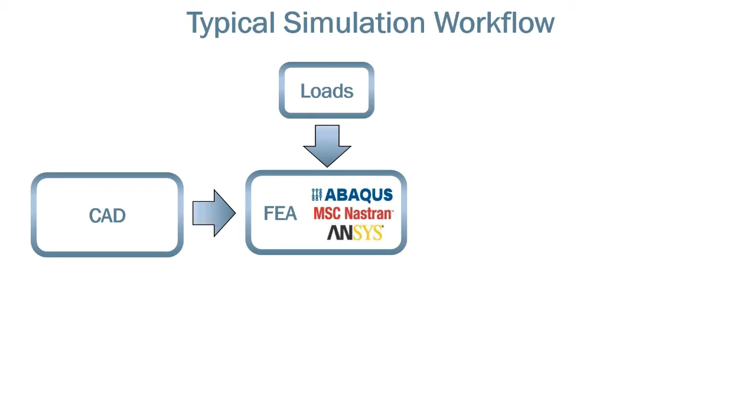Let's talk about what a typical simulation workflow may look like. Most of you are familiar with having some type of CAD model, then moving into doing FE analysis using Abaqus, Nastran, ANSYS, or any of the other dozens of solvers that are out there. Typically, you'll have some loads that you apply to that analysis — maybe some calculated worst case loads, maybe limit loads, maybe some inertial loading, etc. But somehow you've either measured or generated or calculated some kind of loads that you apply to the system.

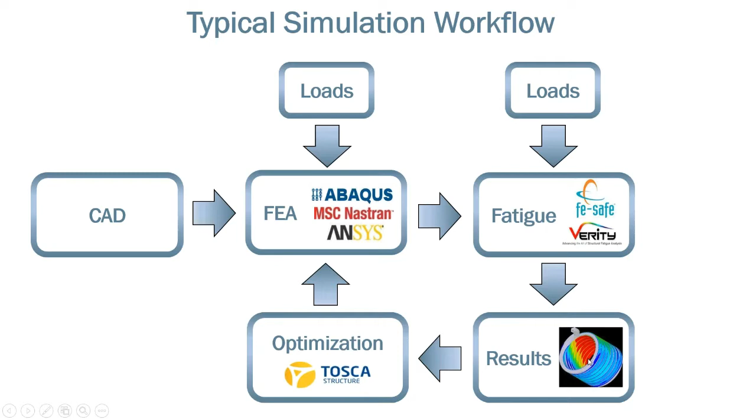From there, typically most people will then go into potentially a fatigue analysis process, taking either combinations of load cases and applying them to do a fatigue calculation, or using some kind of unit load scenario where you have time histories of loads that scale and combine on those unit loads. Output from a fatigue process will be some type of life results in terms of hours, repeats, miles, etc.

Then potentially you could go into some kind of optimization process. In this case, we're showing Tosca, and then go back into some redesign, analyze loop there.

So while we were at Caterpillar, we spent a lot of time and effort trying to get accurate time histories of loads. We would take our machines and use machine pins, and calibrate those pins so that we could measure from the strain what load was coming through them.

We would take any type of joint system, whether it's an axle or shaft or something, in machine areas where we could lay strain gauges. We had to lay strain gauges on our hydraulic cylinders so we could accurately measure loads coming in through there.

So we could get a full time history of loads for that structure for a complete event, and then be able to take that load data and cycle it back through in some kind of FE analysis or fatigue analysis, either at certain set points or a complete duty cycle.

While we were there, for every vehicle and every load case or every duty cycle that we tried to validate, we would spend upwards of $250K on just acquiring the load data. And that doesn't account for any of the time afterwards.

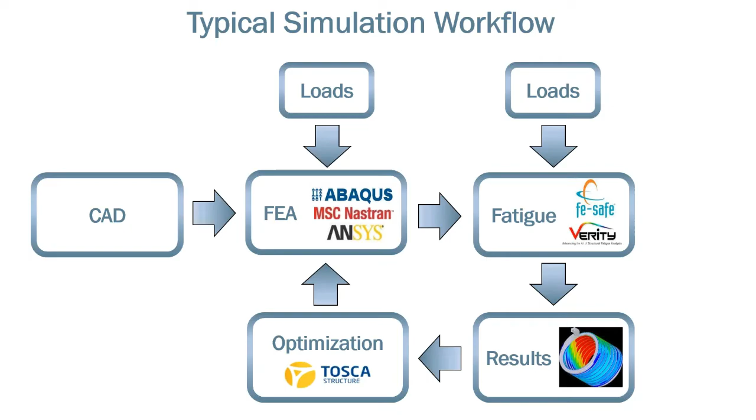But before I get too far, I want to show an example that a customer sent to me last week. This customer said, hey, we have a tube that we want to measure some loads on. They'd had some idea about TrueLoad, but they said, hey, we want to measure some loads.

We really don't have a lot of time here, but we've looked up in our handbook, and for a round tube, we can put strain gauges on and calculate the torque load that's coming out of there.

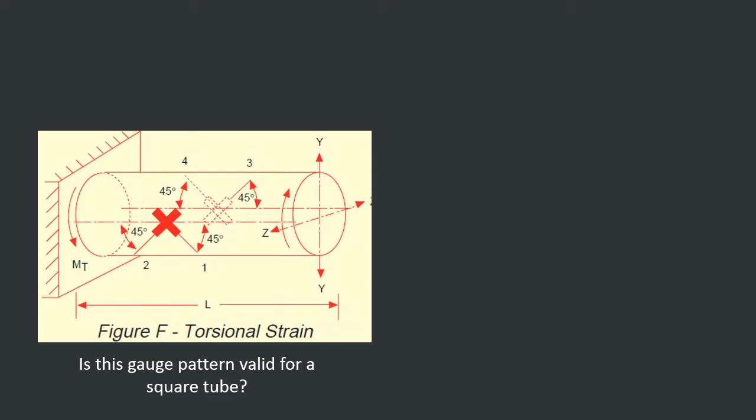Is this process still valid for a square tube? I said, yeah, we can probably still do that for a square tube. We can put some stuff on. I said, send us the geometry, let us take a look at it.

So they sent us the tube. Okay, but the tube has some structure coming out of it, and they not only have a moment out here on the end, but they also have an offset load here. Okay, that we could probably still work with. But then they came back and said, well, it's not really just that.

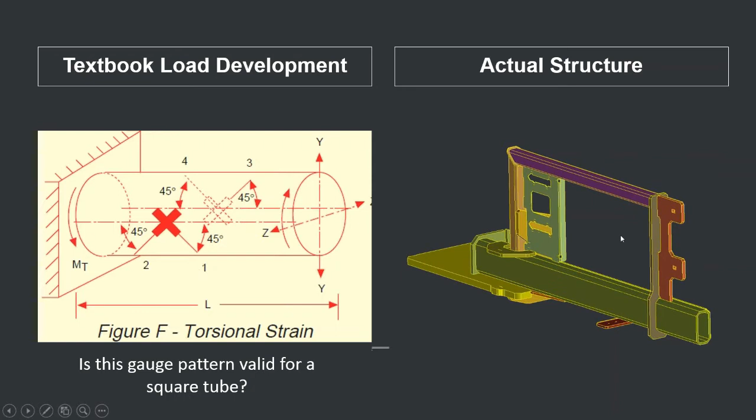We've also got some other components attached here, and we've got some side loads coming in through this structure as well as some vertical loads. So now we're not just talking about a torsion or a moment anymore, we also have a bending load.

And then as you look a little further, they have some additional structure attached to the system, and when you look at the full system, this is what it looks like. Just like in real life, these textbook examples don't usually correlate very well to what you really have. So we went through and said we really need to use true load for this, and convinced our customer that's probably the best way to go to place our gauges and go through that process.

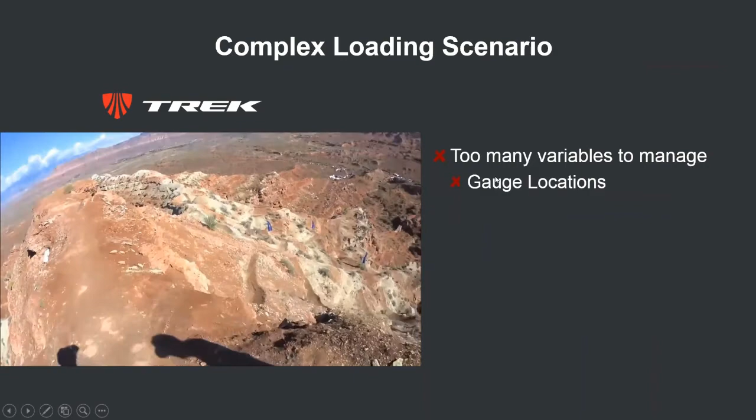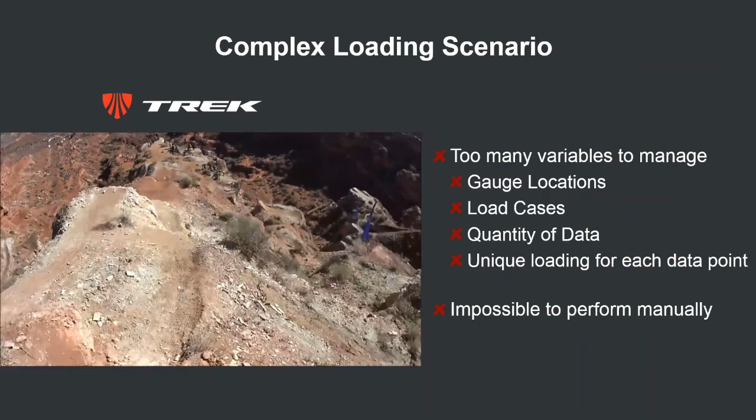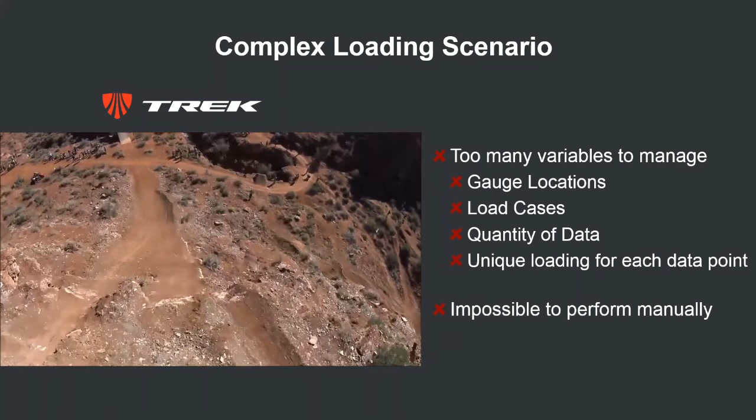So as we look at different complex loading scenarios, I want to show something that one of our other customers has used. This customer, Trek, has bike frames with very complex loads coming in. They went out, before they found true load, and gauged up this frame trying to calculate loads coming into it. During that process they had 20 or 30 different gauges that they're trying to locate and manage, with a lot of different load cases.

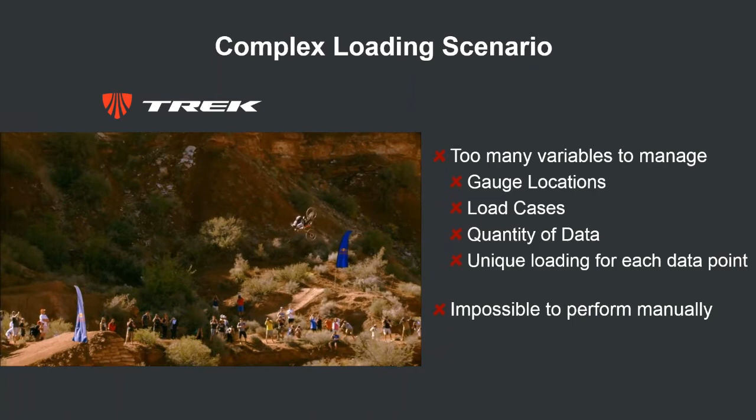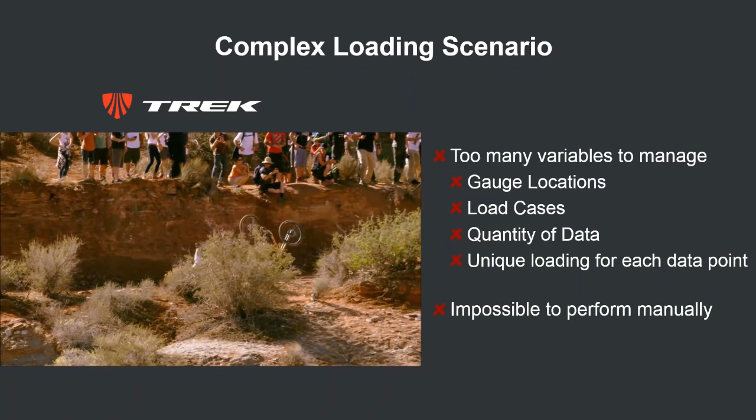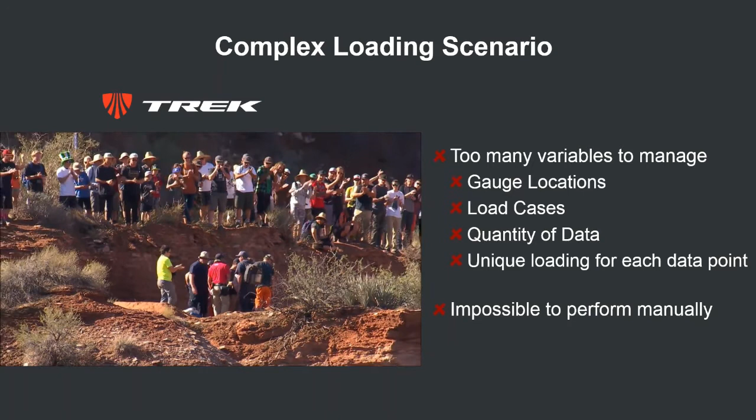They're looking at the different quantity of the data they got. They have unique loading points for each, unique loading data for each load case, and it was impossible for them to perform this manually. You can see in this type of event the kind of severe loading that goes into one of their structures. Now the good news is this rider's okay, he gets up and no problems. But we wanted to show you this as an example of some of the extreme load cases that happen.

So let's get back and talk about true load a little bit. True load was developed by Dr. Tim Hunter through his 22 years at Harley-Davidson. There he was the chief engineer for vehicle structures, and when he left Harley in 2010, he founded Wolf Star Technologies.

So Tim used true load. During his time at Harley, they would spend a lot of time building prototypes, and what they called a prototype was essentially about 85 different motorcycles that covered the different variations of their configuration for each platform. When Tim started the process, they were building about 6 different prototype phases. So 6 times 85, that's a lot of motorcycles - that's millions of dollars they're spending.

They'd get through the process, and during some of those phases they'd find, hey, their loads are wrong, or they're having cracking problems, or they're having failures. Tim mentioned one instance where they're ready to roll the product off the line, and they found very late in the test phase that they hadn't accounted for a different unique loading scenario, and they had to stop their production and spent several million dollars.

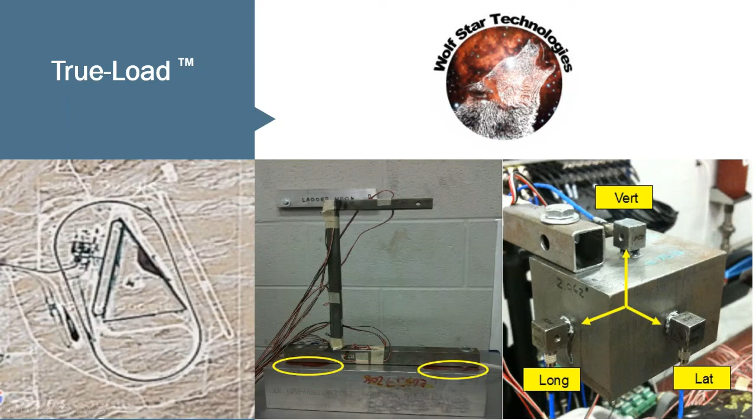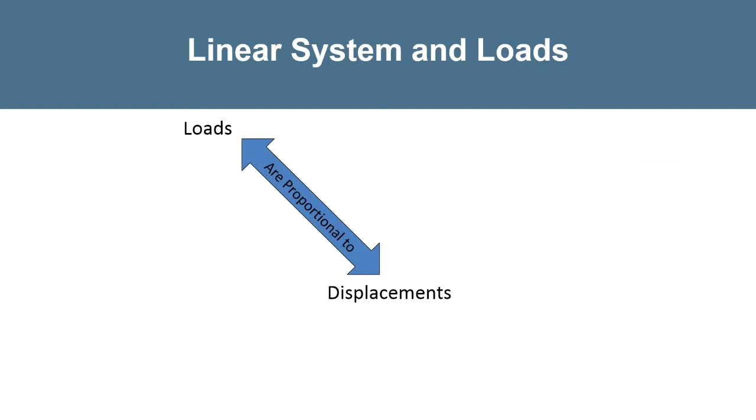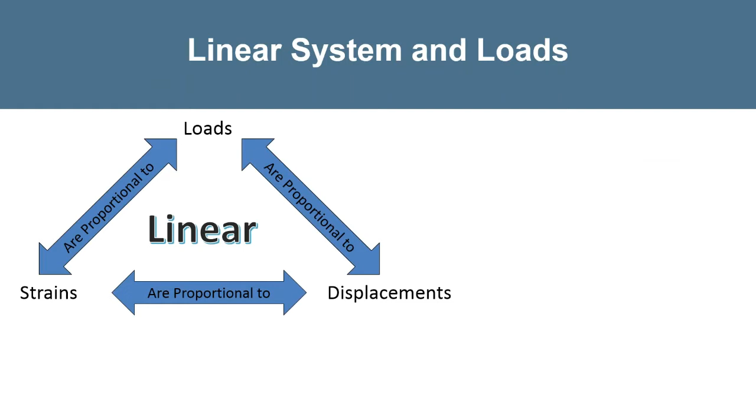So let's talk a little bit about what TrueLoad is. TrueLoad is a linear system. It works on the principle that loads are proportional to displacements, displacements are proportional to strains, and strains are proportional to loads. So what it requires is that globally your structure behaves linearly. It can have local nonlinearities, local material nonlinearities, contacts, etc., but globally your structure behaves linear.

In other words, what we're doing is setting up an equation, F equals Kx, or if we rewrite that equation, strain times the correlation matrix equals F. We're getting our forces from the strains in the system. The strains come from test, the correlation matrix comes from FE. We're able to combine those two to back-calculate what our forces in the system are.

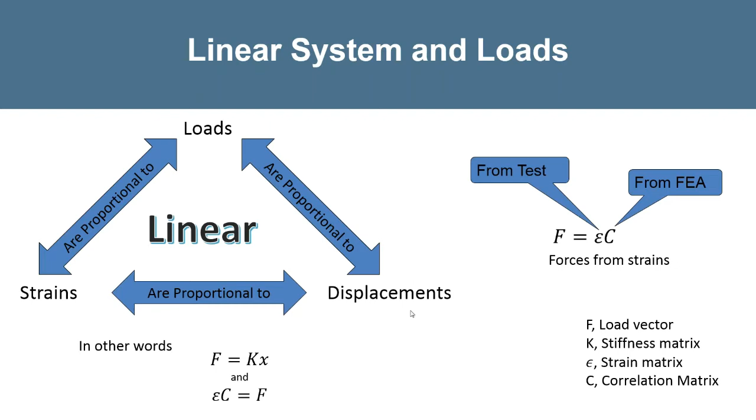So as we go through, let's talk about the TrueLoad process. I'm going to walk through a couple of steps of what that process looks like, then we'll get into some examples and dig into more details of how TrueLoad actually works.

Step one is collecting the data, what we like to call a pre-test. You build some type of FE model and apply your best known loads and boundary conditions to it - what unit loads you think are going to be applied, in what directions, and how that model is constrained. This is one of the areas that TrueLoad really brings to the front: you really need to understand the loads and boundary conditions of the model and how it's actually behaving.

What assumptions can I make? Anytime we have problems with correlation, we usually can go back and look at whether we made the right assumptions, and tweak those assumptions to get better correlation. But this is 90% of our problem - understanding what our actual loads and boundary conditions are.

So once we have our unit load model, we'll run what we call pre-test. That's essentially identifying and locating the gauges on the system. TrueLoad has an algorithm to go in and place gauges in the best locations, and it also has tools to tweak those gauges so that if you've given it areas that may be hard to reach, we can simply move or reorient those gauges to be more conducive to applying in test.

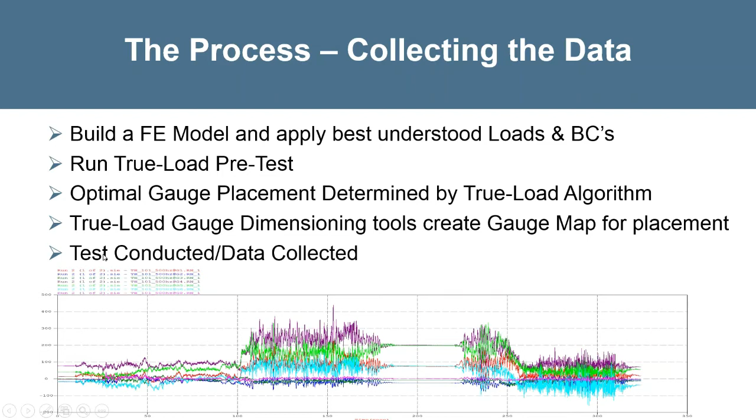Once we've identified the gauge locations, TrueLoad's pretest component has some very nice gauge dimensioning tools that we can use to create a gauge map to give to the test department to lay them, or if you're a small company, you may go out and lay some yourself. Then we'll come back and conduct the test and collect this data.

So now once we've collected our strain data, we need to go back in and calculate the loads. We take that collected strain data from the test and feed it back through TrueLoad. TrueLoad is going to essentially multiply that strain data by our correlation matrix that we calculated in pretest, to calculate the calculated loads and load time histories.

General rule of thumb is we need about 1.5 to 2 times the number of strain gauges to the loads we're trying to calculate. Because we're trying to solve a linear system of equations, we need more knowns than we have unknowns.

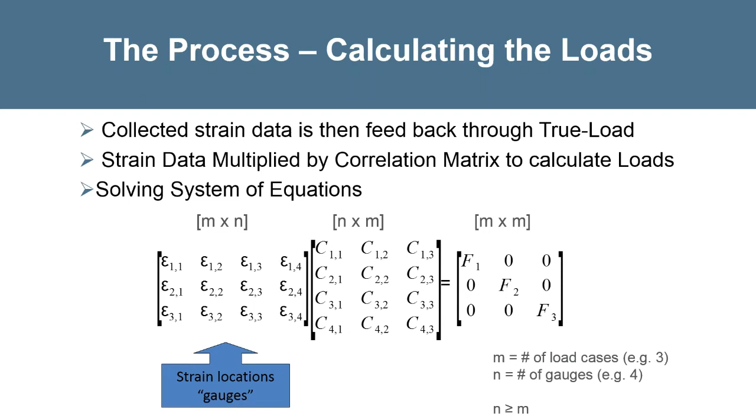Once we've calculated that load data, TrueLoad has a very nice set of tools to go through and do correlation and plot history plots to validate how well the system is correlating. TrueLoad automatically creates what we call a cross plot, which is our FEA strain versus our field strain.

The process is we plug our test strain, our field strain, back into TrueLoad, which calculates the load time histories, and then automatically feeds those load time histories back through the model to get the FEA strain, and then plots that strain against our field strain. If we have a very well correlated model, that data should line up on a 45-degree line.

In some cases it doesn't, where we may not be using the right assumptions. It also has some very nice tools to plot field strain versus simulated strain, so you can see how well it correlates, or see areas where things may not correlate very well.

In addition, what's very nice is it has ways to automate that time history. So instead of resolving the model for a full time history, it automatically scales and combines your unit loads times the calculated load data to get full field strain, stress, and displacement data for these duty cycles.

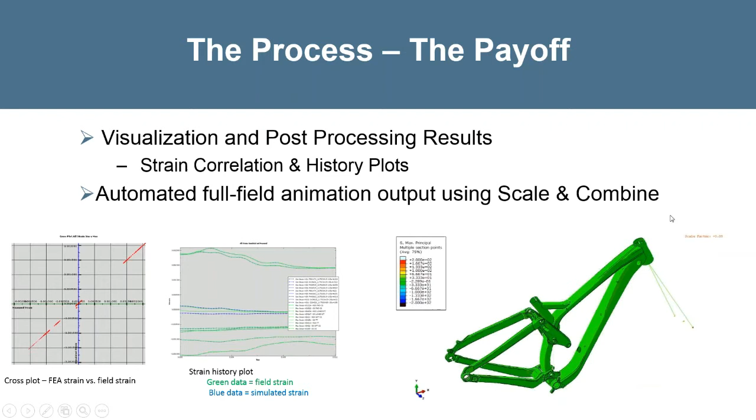So that was a brief look at it. I'm going to go through more of TrueLoad later and get into the nuts and bolts and the details, but I wanted to give you that high-level overview.

Back to our simulation workflow, we've got our FE model and we're looking at fatigue results. TrueLoad now replaces our loads that were maybe calculated by hand with a plus-minus scenario. So instead of having some worst case or static loads, we're now able to use TrueLoad to calculate a full time history of loads to really get in and perform detailed fatigue analysis with accurate load data.

So the workflow replaces any of the load data that we were calculating manually or with some hand calcs with actual full data from a physical test.

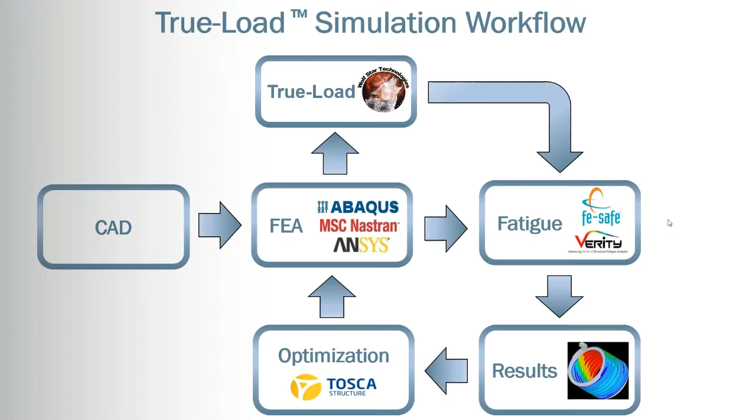So what I want to look at now are some examples and applications of TrueLoad, how we use it, where we've had some customers with success, and several techniques that we've applied.

One of the first projects we worked on with Tim was calculating blade loads for a bulldozer. In this scenario, one of our customers was having a very difficult time calculating ground engaging loads and really correlating the model and validating that if we even went into a lab and applied a known load, we could get the same type of strains and load data back out of the system.

So we went in with this customer and worked with them and said, okay, let's apply a series of gauges along the push beams and on the back of the blade so that we can go in and apply a known load and see if we can get actual strain data back out that would match.

What we were able to do then is not only did we have our TrueLoad gauges, but we also applied gauges near some welds, essentially in some hot spots that we could use to correlate our test data and correlate our model. After we got done and went through a couple iterations where we had to tweak some of the assumptions that we put into the model and how some of the connections in the system were made, we found that we could very well correlate strains in the model with strains measured in the test.

And we're within about 5% correlation when we looked at high strains in an area of high strain gradient near a weld.

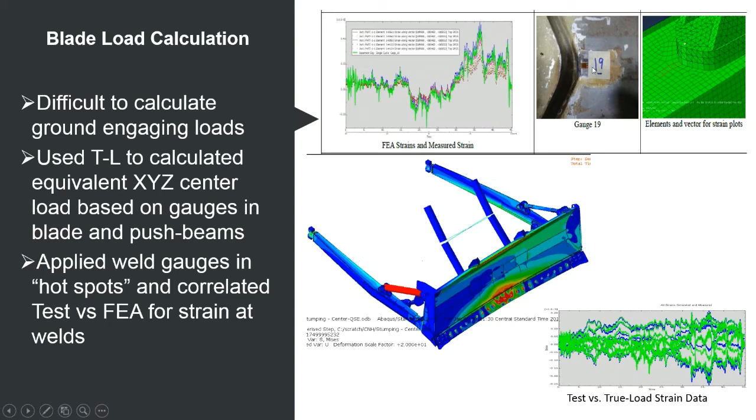Another example that we have is a crankshaft example. This customer had known that they had failure locations for a long time, and they were trying to figure out exactly how to solve that, what was causing those loads. But they couldn't get their simulations to match the test data and identify what was causing it.

TrueLoad was able to go in and apply essentially the right recipe, the right combination of loads, and it happened to be a series of dynamic loads and static loads that produced the right combination to show what was going on. In this case, we used a set of modal loads combined with quasi-static scalar loads on top of it to come up and produce the right system.

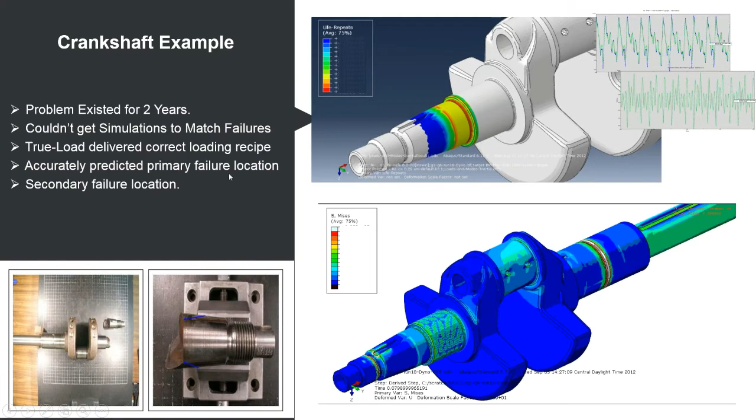Not only did TrueLoad identify the proper failure area, it also identified a secondary failure area. When we showed that to the customer and questioned them about it, they said, yeah, every once in a while we actually have failures there too. So we matched both failure locations and accurately predicted the primary failure location in terms of stress and life.

Another example we want to talk about is a customer of ours, Trek. They use TrueLoad to develop a better set of load cases for them to analyze their bike frame.

Historically, what they've been doing, and in the bike industry this is very common, is they have a set of known load cases that all bikes are rated against. Essentially, these are static lab load cases, and you can go in there and measure strains on the bike, but bikes are rated by this essentially by how stiff they are. Where these loads came from, no one really knows. How well do they actually correlate to how well a bike is performing is very questionable. There was no side loads, no fork loads. They had a certain load that was applied.

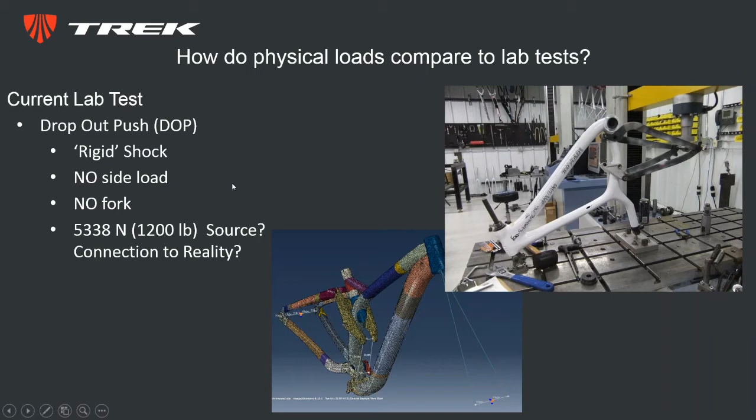Our customer really questioned where this came from and how close to reality these loads are. So this was what drove them into looking at how they could use TrueLoad to get a better handle on this. They set up a data acquisition system on their bicycle with 24 channels, 12 strain gauges, 3 triax accelerometers, a potentiometer, and a Hall effect sensor. They custom designed the wire harness and carriage system and built a pretty unique data acquisition system to collect data as they went through some of these extreme events.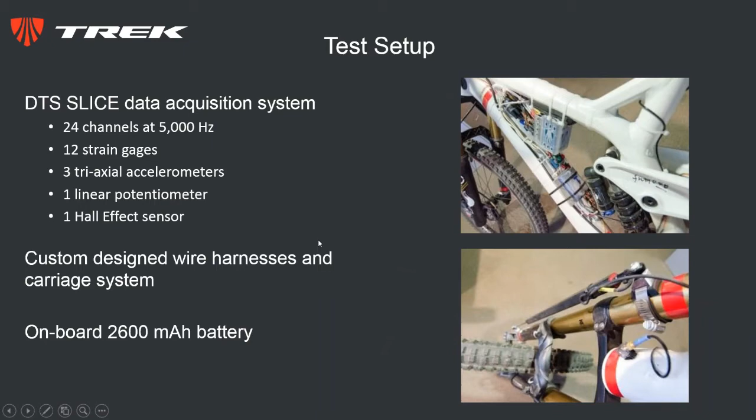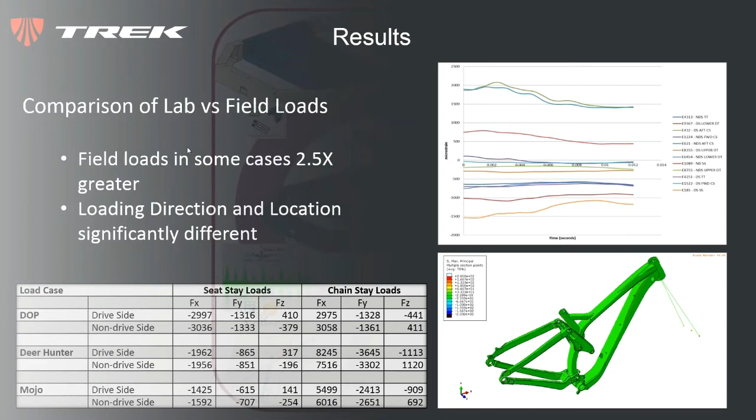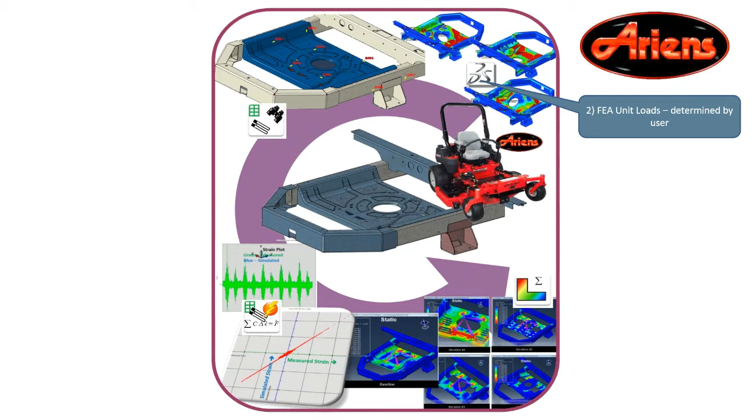Another example is a customer, Ariens. They had an engine deck they were having trouble with. They were trying to understand what was causing some of the failures and what load cases were coming into it. What they ended up doing is developing something very simple: the user attached a mass to this structure and applied an XYZ load to the mass, essentially representing acceleration of the engine as this structure went through loading scenarios.

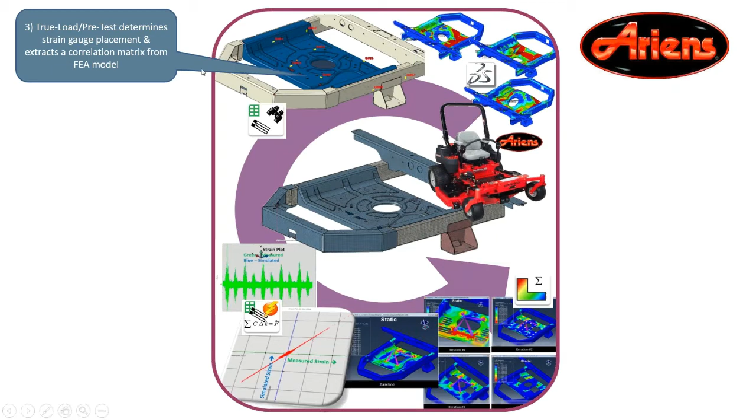They then used TrueLoad to identify, based on those 3 unit loads, strain gauge locations and placement, and calculate the correlation matrix. They collected that test data, fed it back through the system, and looked at how well it correlated. What TrueLoad is doing in this case is calculating equivalent loads that produce that same strain history for that part, and it did it very well.

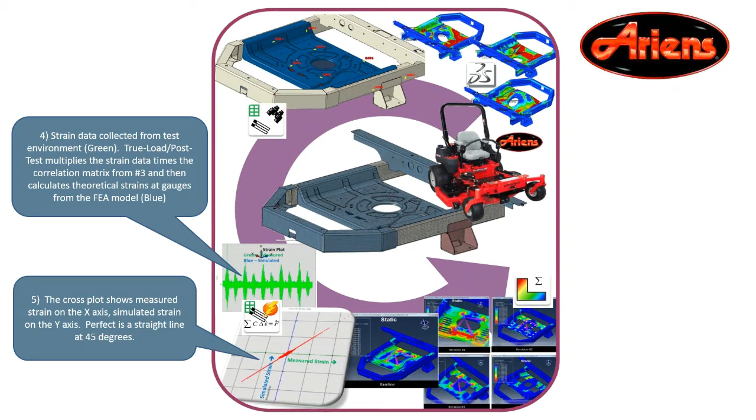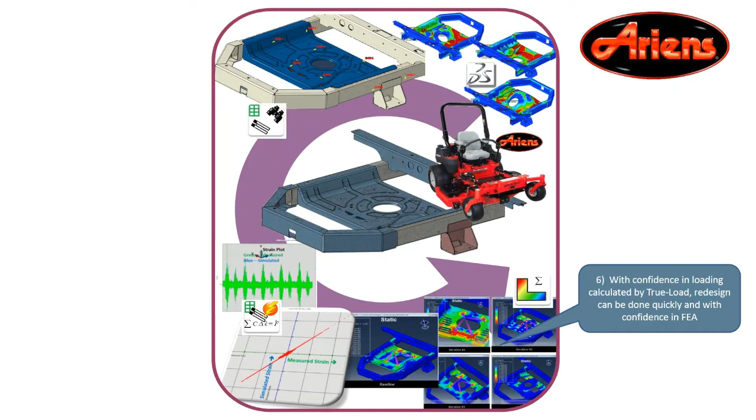It was very straightforward. In a short amount of time, they were able to develop an accurate set of fatigue load cases that matched up with the failure areas they were seeing. This allowed them to use those simple load cases to quickly redesign their structure, and in a matter of less than a few days, they built 4 different designs, iterated through all 4, found the best one, optimized and tweaked that design, then chose the best design to make a prototype and go back out and test. So TrueLoad gave them a set of good load cases to go through the design process with, quickly iterate through their design iterations with confidence, and go back out. Instead of having to do 4 separate tests, they really only had to do 1, significantly reducing their test costs.

One final example I want to talk about is a wheel force transducer method. This is something we've been working on for a little while. We have a rim customer that we've been developing it with, and we've worked with them to develop a way to place strain gauges — right now 32 uniaxial strain gauges on the rim structure — that can turn that rim into a wheel force transducer. Using those 32 gauges, we can calculate continuous rolling and tire carcass loads that we can then resolve to XYZ or axle loads to replace a wheel force transducer.

Right now we have taken this process as we've validated it analytically. We're working with our rim manufacturer to do this process for them internally. We're also looking for other commercial partners that we can validate this process physically with as well.

If any of you here on the webinar are looking at using wheel force transducers, we know how expensive they are. If you ever break one, they're very difficult to replace, and they actually change your loads as you're going into the system. We think we can use the physical rim to replace the wheel force transducer and get you better load data for significant reduction in cost for wheel force loads. So if you're looking to do that, we're looking for people to partner with that we'd love to work with you on.

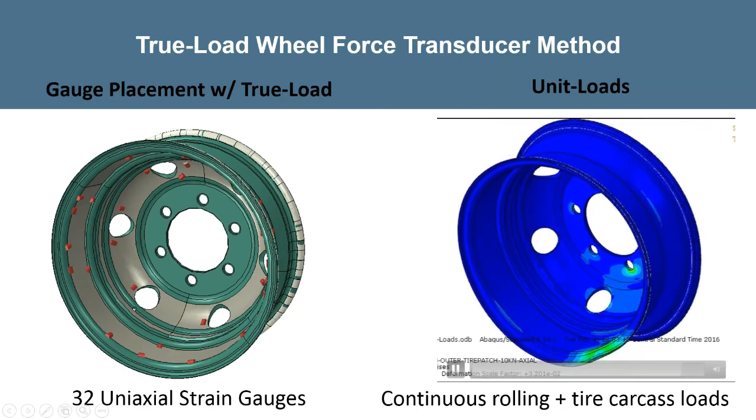So I'm going to go through one final case study. This is the K-Tech Earth Mover case study. This is a project we did last year. Talk through some of the details of this project and show you how we were able to work with them to identify better loads and understand their system.

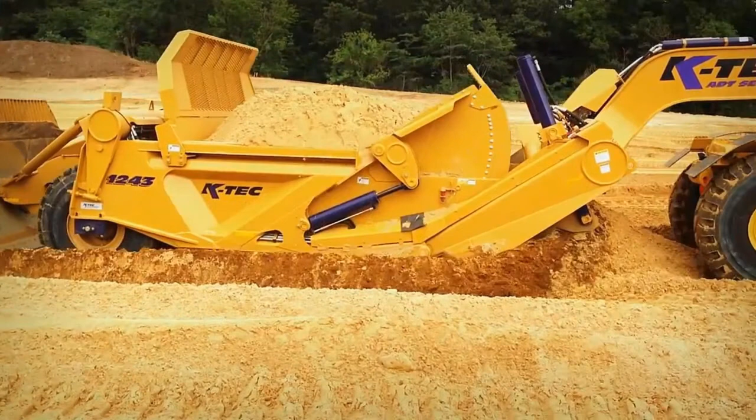Through that process, I want to show you a little video of what their structure is. So they make what's called a pull-behind scraper. In this case, it's hooked up to an ADT dump truck, and they actually push it with a dozer. This scraper comes in various sizes, all the way from a 20-yard up to a 60-yard vehicle. They'll load it up, have it push-loaded with a dozer, and then haul that anywhere from a quarter mile to a half mile, a couple miles down the road to dump it.

In this case, this customer needed to understand the time history of loading to their system. They had a couple of unique static loads they were trying to apply, but they needed a much better idea of the time history of loads. They needed to develop what was a representative duty cycle of the system, how that duty cycle affects the fatigue life, do fatigue life calculations, and look at optimizing the system to reduce weight and cost. Because every pound they have in their system means another pound you have to carry around empty and full, additional fuel costs, less payload, less efficiency of the system.

So the part we did, we did two projects for this customer, one for what they call the C-frame, and then one for the tail. So what we're going to focus on today is the tail and looking at this weldment right here.

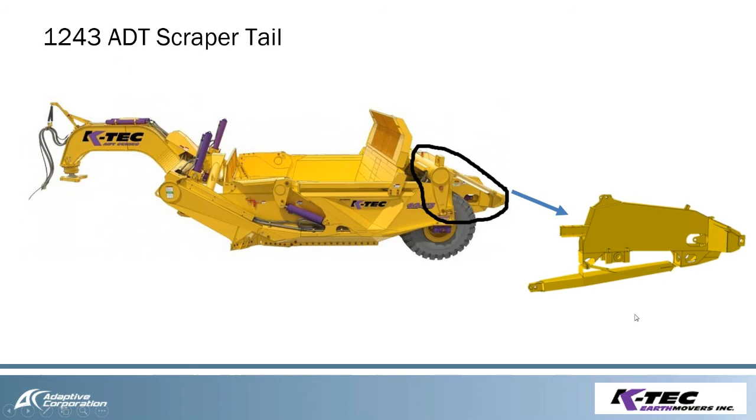In this project, we had a couple of goals: one, create an FE model of the tail system that actually represented the welds, had significant weld detail in there to do fatigue calculations; determine a full time history of the loads on the system using measured data; develop a duty cycle for them from this time history of loads; calculate fatigue life; and then work on performing optimization based on these load time histories.

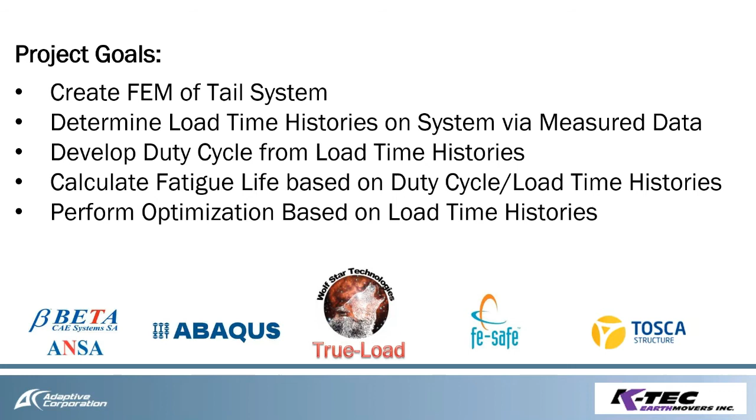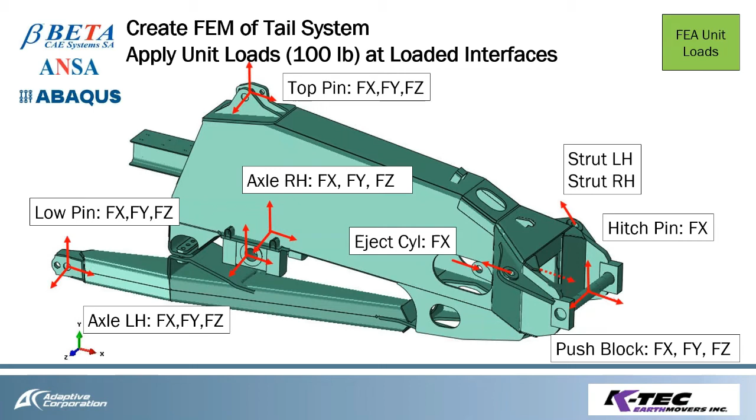So we created an FE model of the tail system, and we applied a set of unit loads to the structure. In this case, we applied a 100-pound unit load at all the attachment points in all the different unique directions that we thought load would come into the system. We had about 32 different loads we applied to the system. From there, we were able to utilize about 50 different strain gauges to work with that.

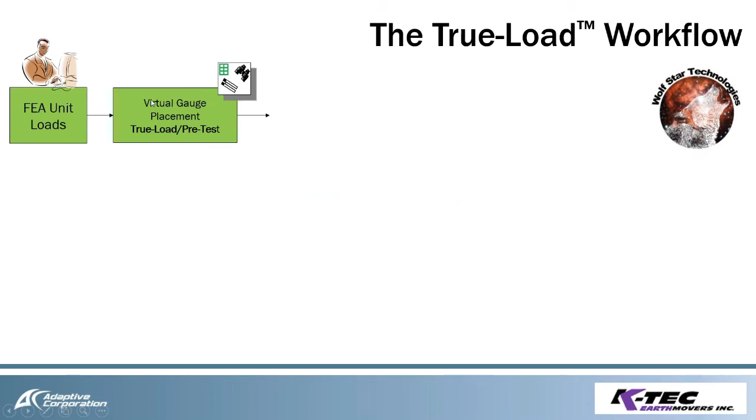As we go through the process, we have an FE model with unit loads. We take that model into TrueLoad, do our virtual gauge placement, go through and calculate strain measurements, bring that process back into TrueLoad for what we call post-test, so calculating the load data, which then gets fed into, in this case, FE-Safe to do fatigue calculations. And then we go back to the previous workflow we saw: some kind of FE tool puts into FE-Safe for fatigue calculations, life contours are output, and go through some kind of redesign process.

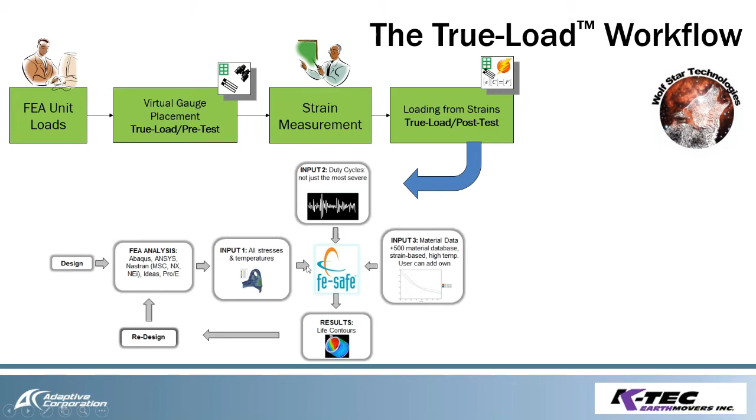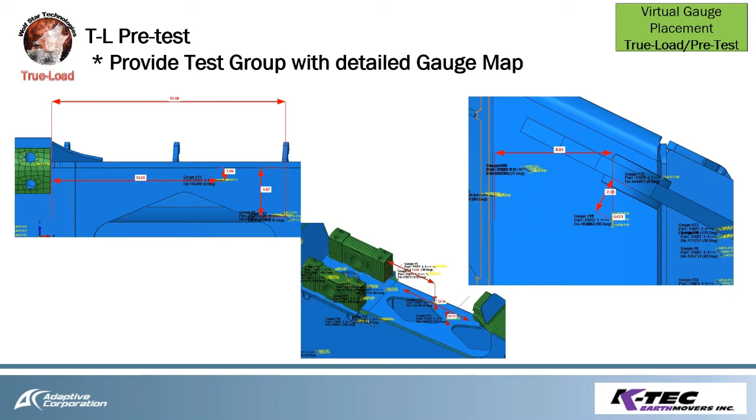So in our TrueLoad pretest, we identified strain gauge locations on the system. We identified about 50 different strain gauges that we applied to the system, and using TrueLoad, gave our customer a gauge map for every one of these strain gauges so they could easily locate them off of, in this case, instead of using the FE geometry, which is mid-planed and surface representations, TrueLoad gives us the ability to bring in the CAD model and dimension these gauges right off of physical CAD locations. So it's much easier for the customer to go through and place these gauges.

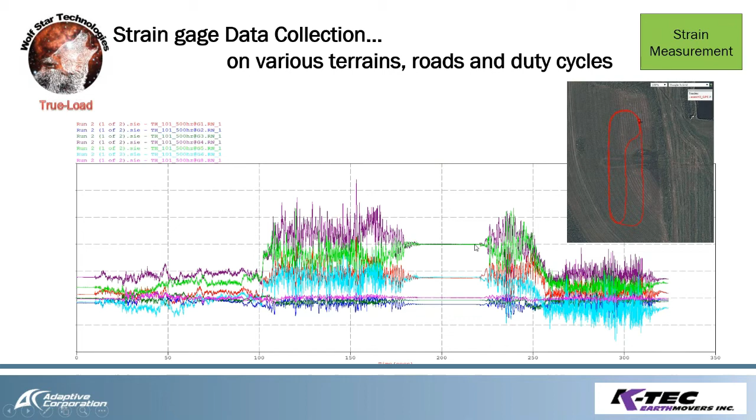Once we've placed the gauges, we went back out and did our strain measurements and recording. To help us validate the system, we always took a little bit of dead time up front when the system was empty, and a little bit of dead time when the system was full, just so we had some static validation points.

Then once we fed that strain data back through, we calculated loads coming back out of the system. In this case, this is what we called event 2, which is a push load with our D8 dozer.

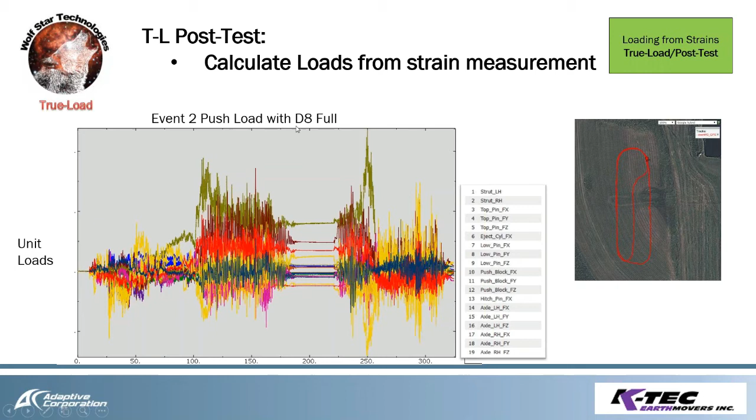One of the ways we correlated and verified the TrueLoad was giving us the right answer is we looked at this time point here at our static payload. We knew from weight what that payload was. We wanted to be able to show that TrueLoad could give us that exact same approximation back.

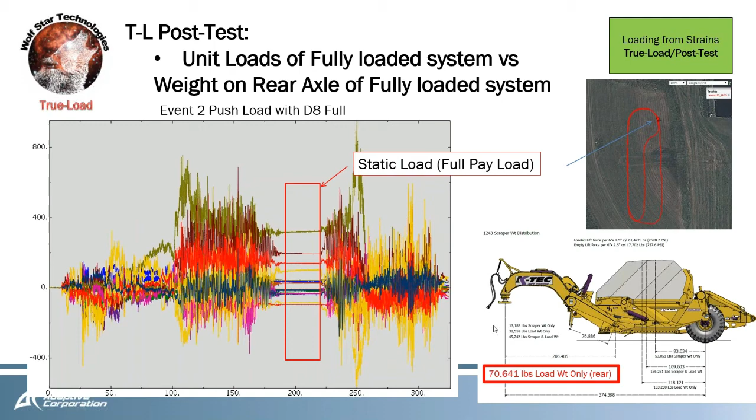So we know that we're at about 70,000 pounds on the rear of the vehicle, and when we looked at TrueLoad with our two left hand and right hand axles, we needed to be, since we only have half of each axle load, at about half that load scenario. The vertical load on the axle is 35, TrueLoad calculated 33, so we're within about 5% of our actual load. We felt this was a very good correlation of TrueLoad, a very good time point to show us that TrueLoad is giving us the actual data back.

And when we plot, again, simulated strain versus measured strain crossplot, we get a nice 45-degree line that shows that we are within what we want to see.

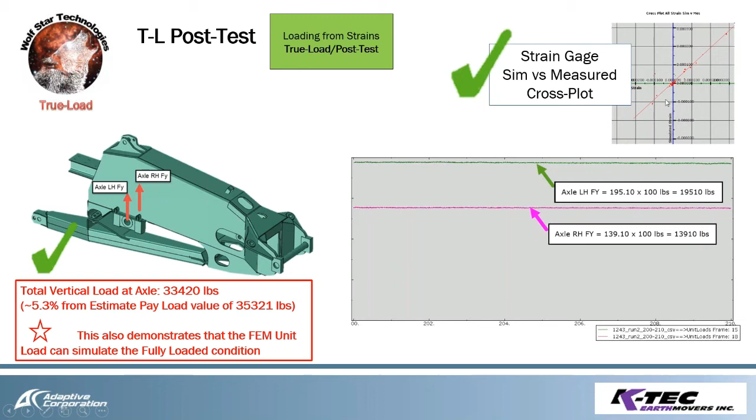So then we went back through and calculated a bunch of all of our different events. In this case, we had 18 different events, went through and performed each event, calculated a time history of loads that we could look through.

The unique thing about this, this customer had really designed their system with the thought process that the D8 push load was the most severe event that this structure saw. So when you come back up in the video that I showed you earlier, you hit this thing with the dozer on the back end, that was going to be one of the most severe load cases that they saw.

They really designed it with about 4 or 5 different back-of-the-napkin hand-calculated static loads, and that one being the severest. What we found on this system as we went out and measured loads, that load case was by no means the severest.

What we found is that their actual hauling when the system is empty were the most severe load cases, because this vehicle travels up to about 20 to 30 miles per hour empty, and when it hits bumps, this system really dynamically excites itself, and loads that we see through the system at that point are much more severe than any of the loads that came through the system when it was loading or loaded.

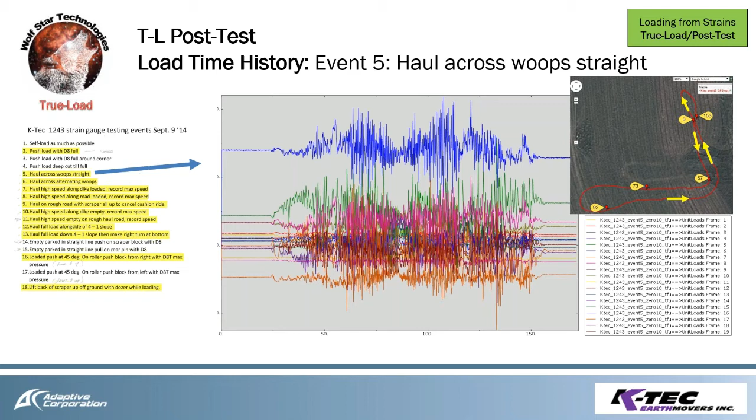So it really changed how we looked at the load cases and how the loading on the system was applied, and how we'd go through and design and look through that.

So what we're able to do is pull out a series of not only static load cases, but also develop a duty cycle for the customer and take all the events, combine them together to get to about 1 hour of operation that represented the full combination of the events that this vehicle saw within an hour time frame.

What this gives us is a convenient way to measure life of the system that is relative to essentially the marketing life that they want to portray to their customers. So instead of talking in terms of cycles or repeats, we can talk in terms of hours, which matches up with their marketing side of the system and their warranty side of the system of saying, we're going to warranty and market this structure for 10,000 or 20,000 hour life.

And so by using FE-Safe and creating a duty cycle, we're able to match that same terminology for the customer.

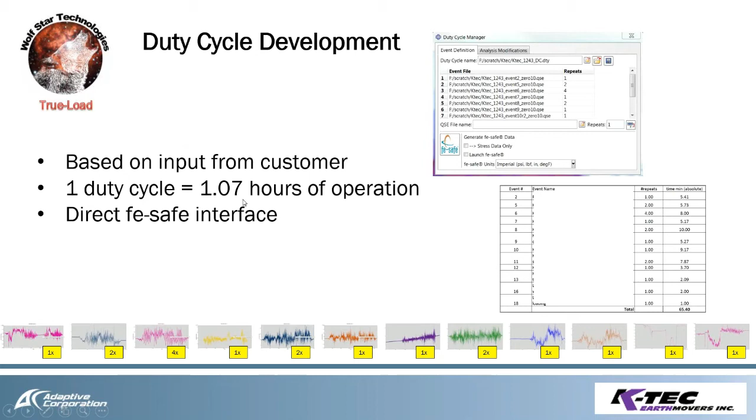So basically our fatigue calculations, we're going to take our data sets, our unit load. Our data set is the unit load of, in this case, Abaqus results, but it could be Nastran, ANSYS. We're going to look at fatigue results, so repeat events in that duty cycle, what we call elastic block, or 1 block per each road event. Then our duty cycle gives us our entire duty cycle, essentially the 1.1 hours of operation.

From that scenario, we get to that scenario for each one of these events. We have all of our unit loads, and each one is being scaled by the time history of load calculated by TrueLoad. As you've seen earlier, TrueLoad can come back in here and create an animation of that event that we can easily process, look at displacements, and see how well that matches up with what we saw. It's much easier to grasp and understand how these loading scenarios are affecting your system.

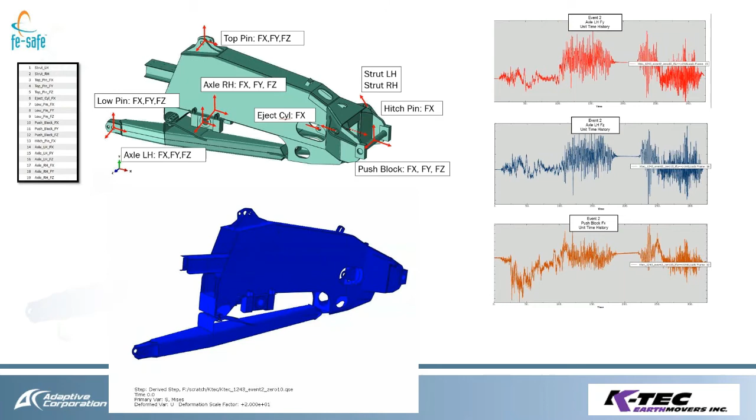From there, with that full duty cycle of events, we can calculate fatigue lives, look at some low fatigue life areas, and work with our customer to improve those low fatigue lives.

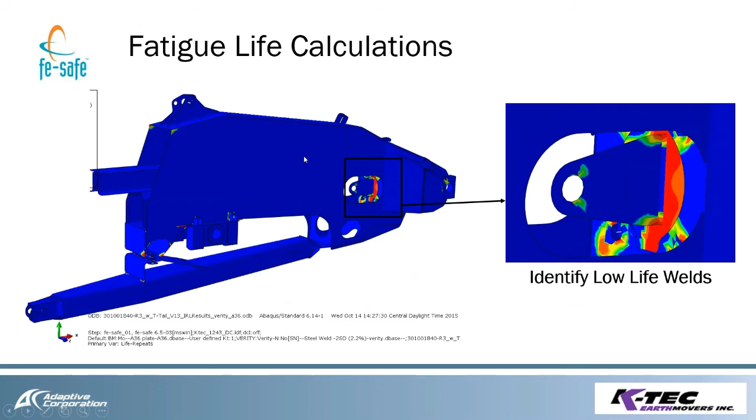As you can see in this system, a lot of the areas have very high fatigue lives. Blue is, in this case, our very high fatigue life areas, which gives us a lot of room for optimization. The next stage of this process, one of the areas we identified, is optimizing one of their welded structures in back, replacing the entire structure with a casting. Not only can we reduce the weight back there by about 50%, we can also significantly reduce their processing costs, the welding and manufacturing costs.

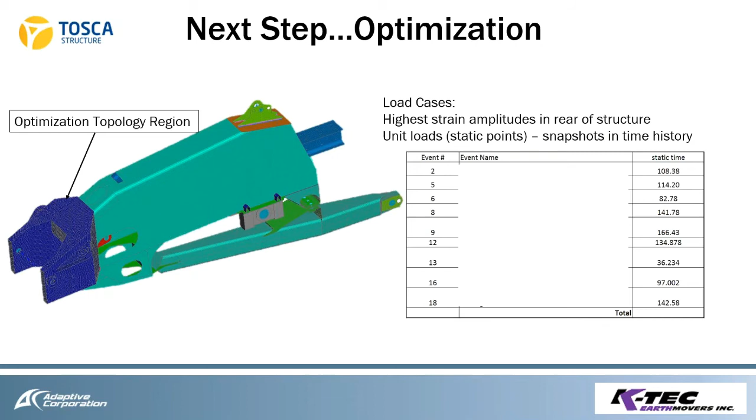One final scenario as we go through this TrueLoad process, I want to talk about some additional functionality in TrueLoad that I didn't hit on here: sliding load functionality. We can take areas along the system where we may have sliding pads, unitize those loads, and develop a set of scalars for these unit loads to provide sliding loads.

In addition, we have hybrid loading functionality where we can replace any single unit load or load on the system with a physical measured load. So say you had a hydraulic cylinder and you were measuring pressure or load on that cylinder, we could replace a TrueLoad calculated load with that measured load, so we could reduce the gauge count we needed for that system on those loads.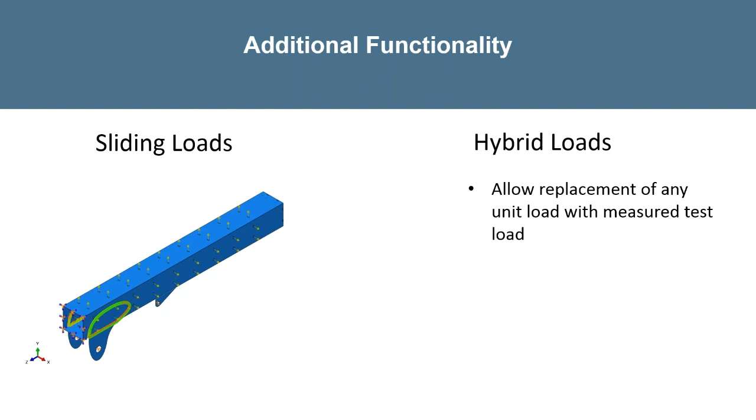One thing I'm going to break out of the PowerPoint here real quick, I also wanted to show a very neat process out of TrueLoad: the HTML report. I feel that Tim doesn't talk about this enough, so I want to point this out a little bit.

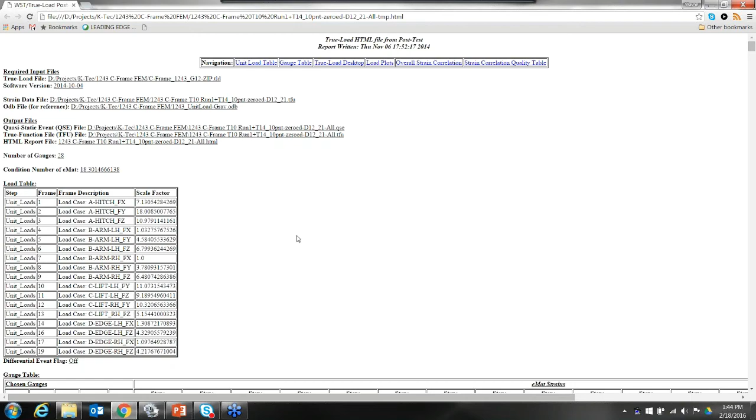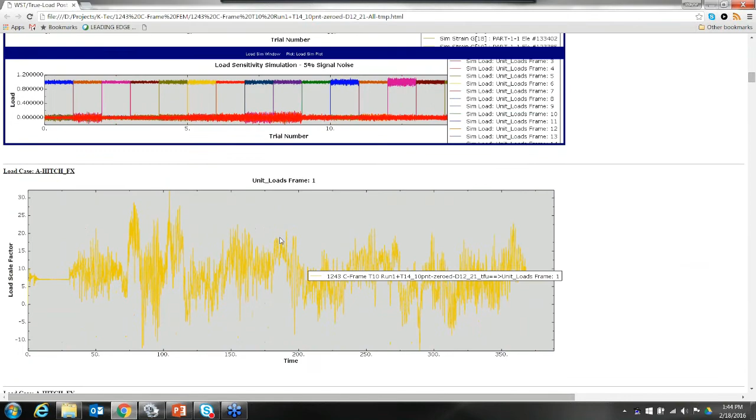Every time you run TrueLoad, it automatically generates a report. It's not maybe the prettiest report, but it gives us a very good set point to understand what was in that TrueLoad model, what was in that run, and talks about all the unit loads applied. We have our correlation matrix, calculates all the strain gauges applied to the system, gives us a load sensitivity chart, and then calculates and shows us all the loads that came out of TrueLoad, essentially the load scalars.

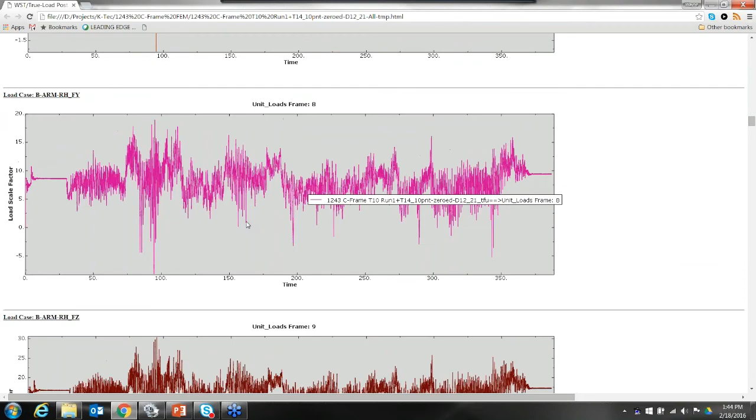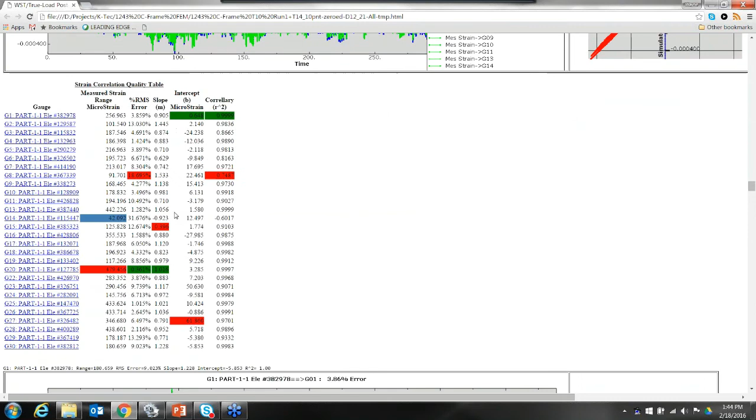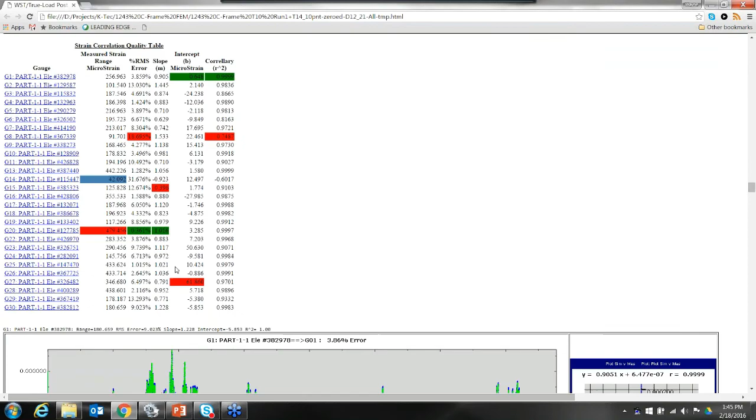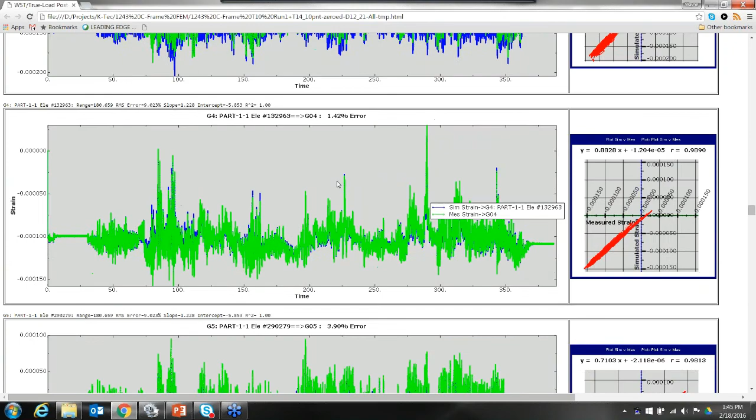As you scroll down, it gives us load correlation charts, strain correlation charts, identifies channels and strain gauges where we had very low microstrain, so they may not be relevant, identifies ones with very high microstrain that may be in some of the yield areas, and identifies our best and worst gauges - in this case 3% error, in this case 13% error - calculating cross plots automatically for every single channel. At the end, it gives us static snapshots of gauge locations. It's a very nice automatic documentation that TrueLoad applies that you're not going to see in some of the other tools out there.